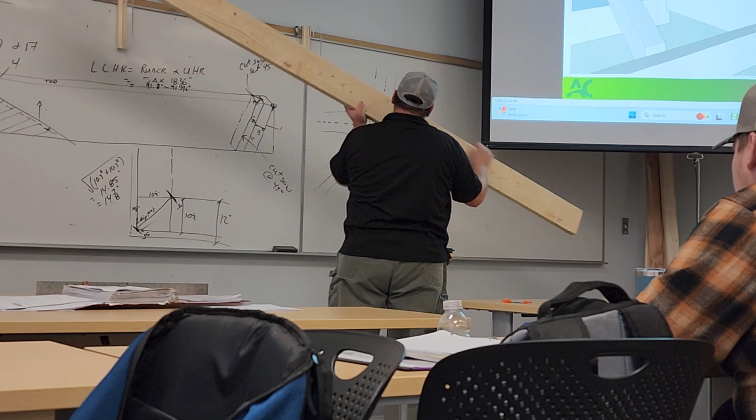Same way we did on the board here. That's probably something you should get used to doing: every time you lay out a rafter, do it the same way. Right? Don't flip around. So when I lay out a rafter, I normally stand on that side of the rafter. I've never changed my pattern. I always stand on that side of the rafter.

Now we start with the ridge on my left. Every time. Basically I have the rafter right here. This is the top of the rafter. I'm on top of the rafter. And I always start on the left side of the rafter, and I go towards the right. That's just the way I always did it. It's ingrained in my head. So try to stay to one pattern. Whatever you do, whatever works for you, stick to it.

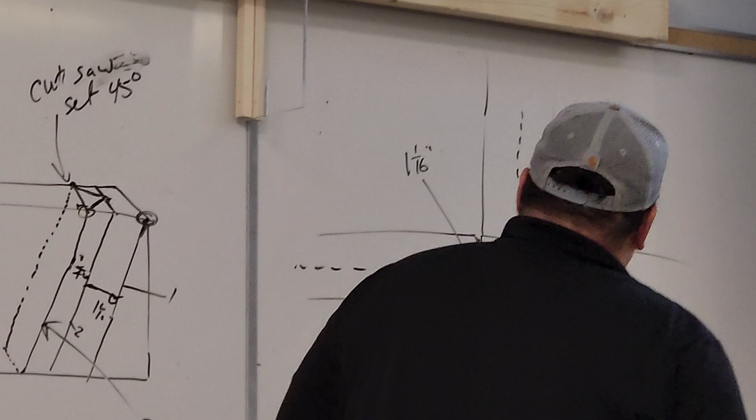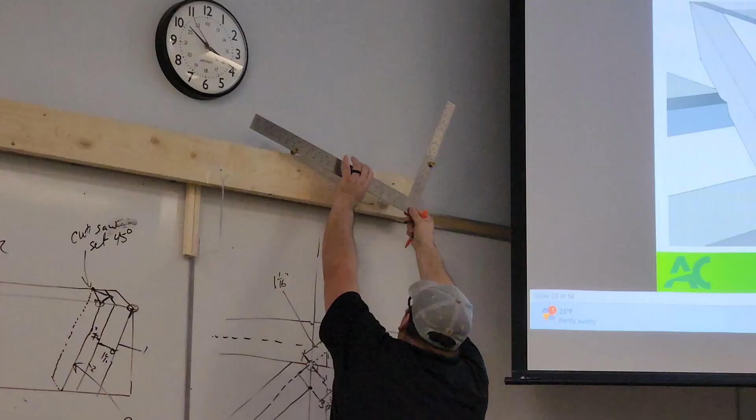Next step is getting that frame square set to 7 and 17. We already have that. And we're going to draw our plumb line 1, right at the corner of the piece of wood, so I can go ahead and hook onto it. I go right to the corner, draw that line right at the corner. Okay? Make sense?

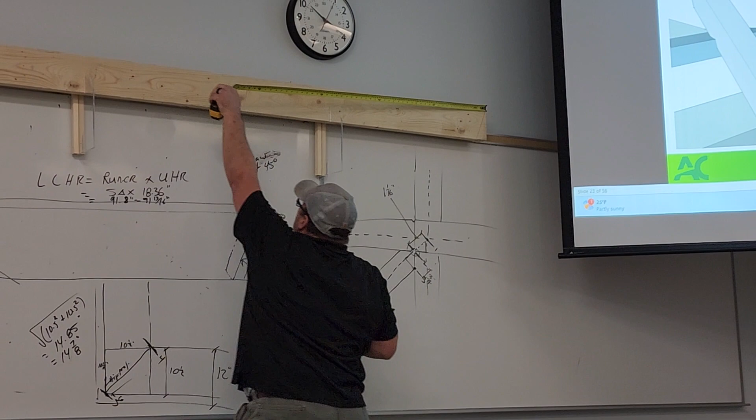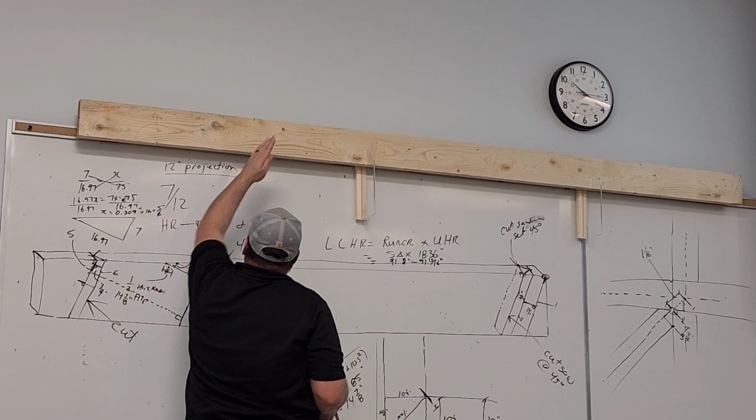Alright, same thing. I'm going to hook on now. I'm going to measure my 91 and 13/16. I'm hooking on right to the corner, going 91 and 13/16. Right at the top. 91 and 13/16. From there, plumb line, right? Which is giving us plumb line 4. Plumb line 4 right here.

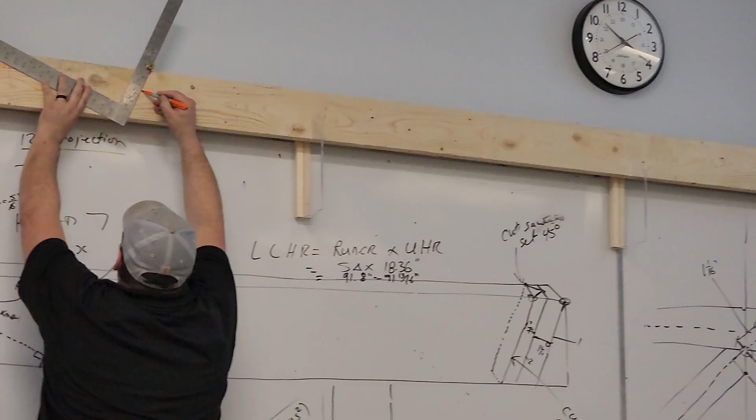Next step is the stand, right? So I draw that line. Our stand was 2.5, I believe. Right, we measure our common rafter. Measure your common rafter, see what your stand is. Do the same. That's basically 0, 1, 2.5. So I'm not going to bother drawing the line on this side because I know it's not right. I'm going to just take it that way.

While the square is sitting there, that's basically 0. I'm going to come to 3/4. So I'm measuring back 3/4. From there to there is 3/4, half the thickness of the hip. I slide my square over there. Hopefully it doesn't fall off the end. Now I got to 90 that up. So bring that to the top of the rafter. Wherever it hits the top of the rafter, I'm going to take it back across.

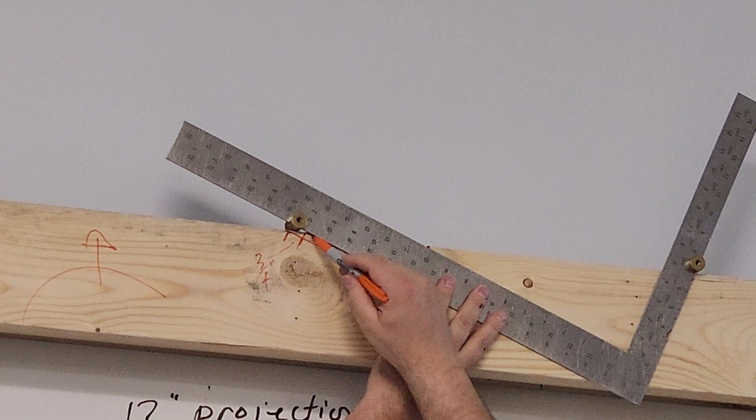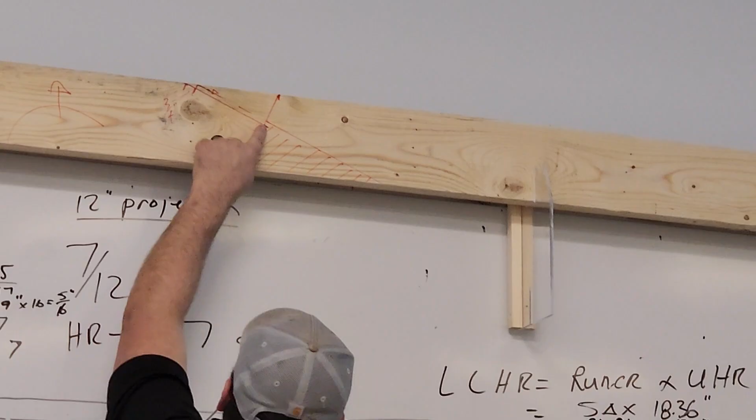So slide it back over. Can't really see if I'm in the right spot there, but probably close. Obviously, if I have it in front of me, I'd be able to see it. I take that line across. That's my cut line. That's where I'm actually cutting my bird's mouth to. That was the original. Carried it over, back 3/4, 90'd up, carried back across.

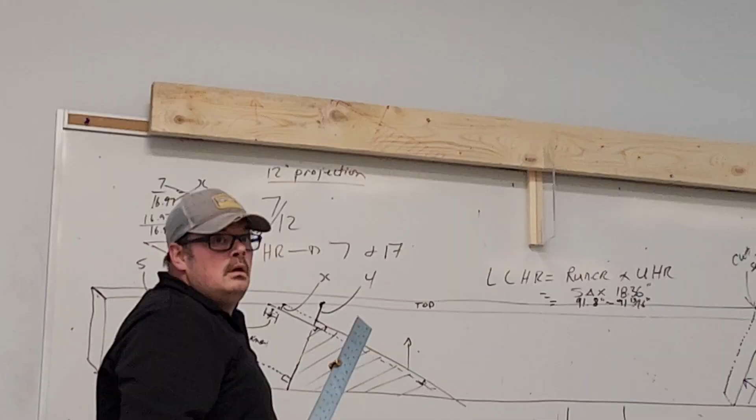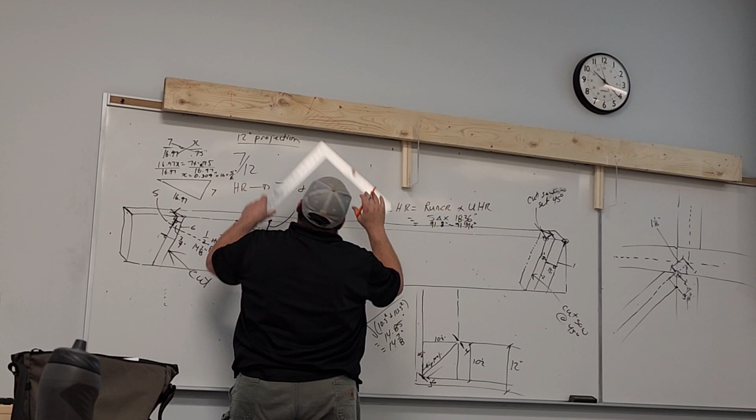What I did is I solved for X. Okay? Geometry, that's all that is. We did the math as well. So if I actually measured that, it's probably 5/16. Should be 5/16. I'm just not very accurate because I'm way above my head. Too short. Okay? Make sense?

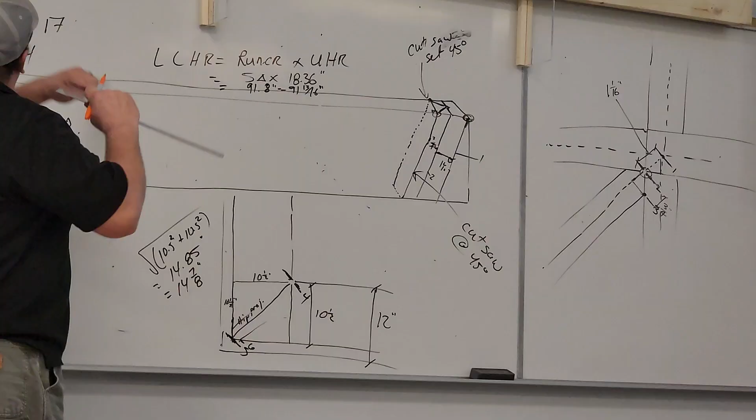Now what I'm going to do is get my projection. So I know the distance from 4 to 5 is my projection, which is 14 7/8. So I'll put that on. That's the corner of the building. Right? That's 4. That's the corner of the building. That's plumb to the earth. That's horizontal. So I'm going to go to 14 7/8. I'm going to put little crosshairs.

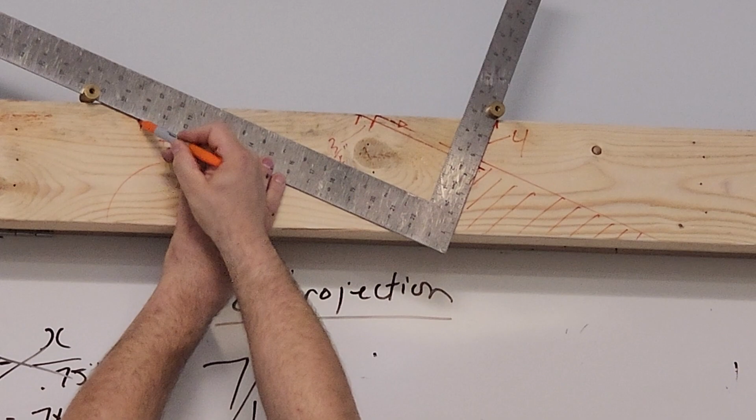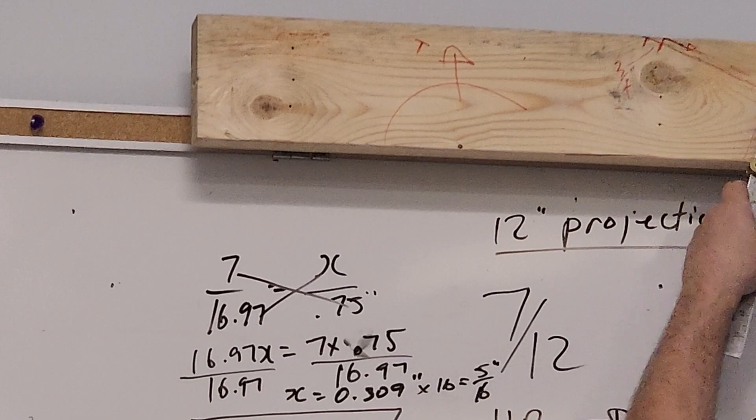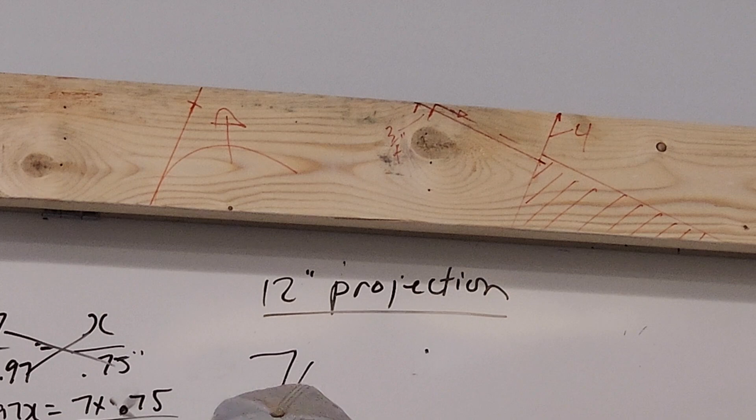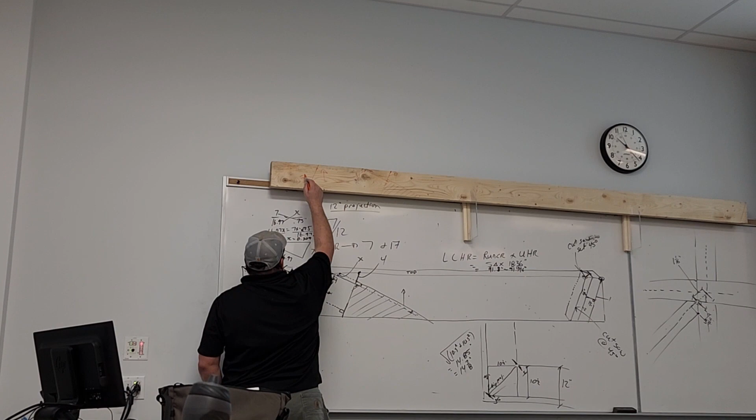See little crosshairs there? So if I had enough wood, I would just slide that over and draw that line there, but I don't. I can just rotate it around. As long as I'm plumb to that, I can use it, right? So make sure that's hitting here, that's hitting here. I hit my intersection of those two lines. I draw that line. This is where it'd be nice to kind of tilt it over. We good so far? That's line 5. Line 5, long point. So I'm going to pull that off now.

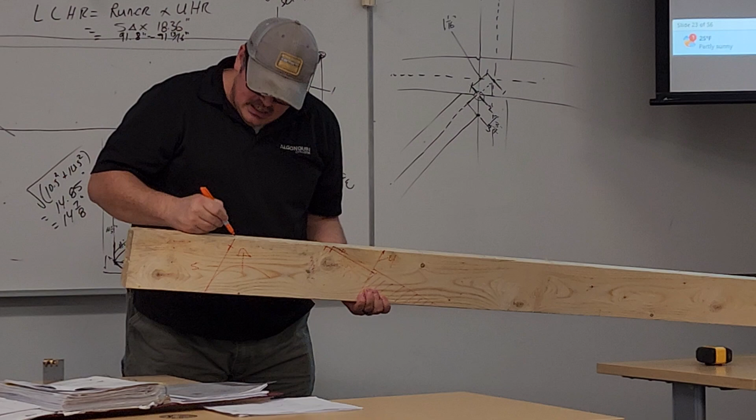And we'll just have a quick little peek there. So this is where I like to tell myself a story, right? So I'm just going to see how I'm sketching it. I'm sketching it across the top. What does that give me? That's giving me the center. So that's the long point. From there, I got to bevel back. See that sketch? It's not accurate. I'm telling myself a story.

I'm telling myself I got to go back 3/4 of an inch now, or if that's 3/4, I got to go back 3/4 here to then get that line. Can everybody see if I leave it here? Yeah. So basically, I'm going to go 90 degrees, 3/4. So draw that 90-degree line, measure 3/4, then I can actually put the square back in place on that line.

That's not my cut line, right? If I connect that to there, that's an accurate side cut. I don't need to put a line there. My saw will do that. My sketch tells me how to set my saw. Now if I take that point and 90 across to the other side, I can then draw it on the other side of the board. Okay? Once I have that point, I go 90 across. Take it from here, bring it to the other side. Now I'll just go on the other side and do the same thing. Right, so I just flipped it over, draw that line.

Now, when I actually have my saw, because I like using a blade on the right side, right, I tilt my saw like that, and I would cut like that. I learned off the old saws, right? Everybody else likes the blade on the left; I can't stand that. I was used to a normal sidewinder saw.

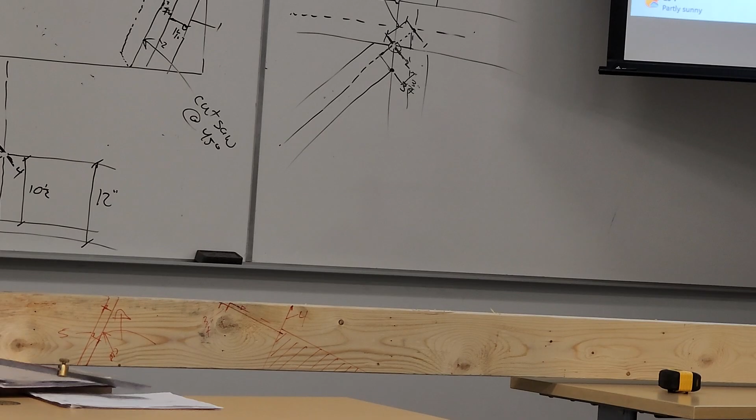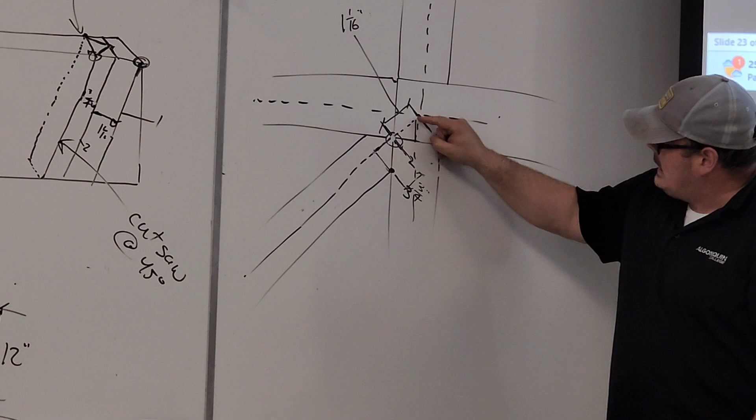Okay? Now, just the top. Let's slide this over a bit here. So I have that line 1. What I gotta get is line 2. Line 2 is the short, right? We're at line 1, we gotta get to line 2. That's 3/4, that's 3/4, that's 1 1/16. Anything on a plan view is horizontal. So I gotta go from that line, go horizontal.

Okay, so 90 degrees to a plumb line is horizontal. I'm gonna make a 90-degree line and go 1 1/16. I made a 90, 1 1/16. That's my short. Now I'm gonna put my square on there and draw that 7. Draw the 7 inside of the square. What does that give me? That gives me the center of the rafter at the longest point.

I'm gonna 90 that across. I could just sketch it though, right? Don't really need it accurate, so I just sketch it onto the top. Find the center, just by eye. Doesn't need to be accurate, just a visual. Then from there, that's the longest point, right? Longest point. I got angle away. So tell yourself that same story. Angle away. Not accurate, but telling me where I gotta go next.

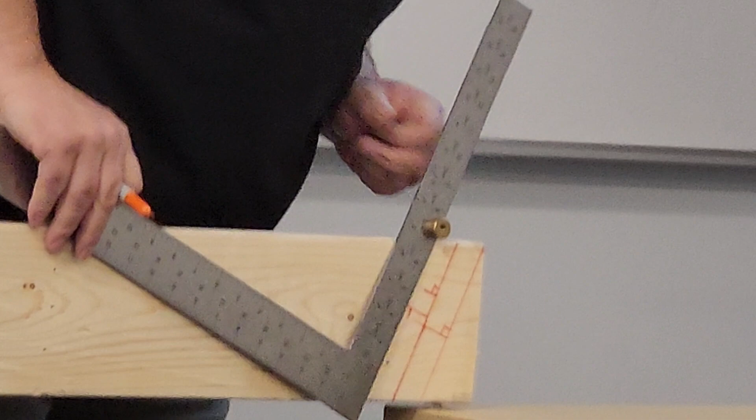If that's 3/4, that means I need to go 3/4 here to get that cut line. So again, it's 90 degrees. I'm gonna draw an accurate line there, 90 degrees to one cut, and draw another 90. I'll measure 3/4 on that line, and that's my new layout line. That's my side cut. Cheat a little off, it doesn't matter, right? Just a sketch. When I actually make the cut, it's gonna go from that point to there.

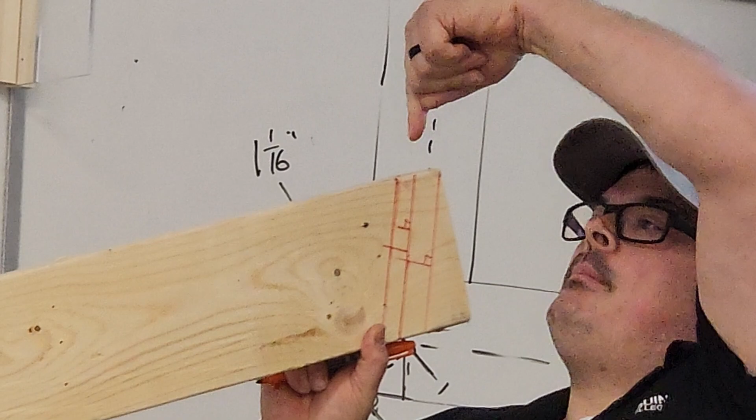Exactly. So the saw is set to a 45. You can't actually draw a 45 on that top view though. This is where it kind of gets confusing. There's a dihedral angle, which is a third angle that gets produced by a compound miter. Whenever you look from a bird's eye view, if I put this perfectly plumb to the earth and I was standing right above it, I see a 45. But when I throw it flat on the surface like this, the angle changes. That's why the side cut on every rafter is different.

You still set the saw to a 45, but you can't take a speed square and mark a 45 across the top. It's not a 45 on the edge. It's a 45 when it's plumb to the earth. When it's on the angle. Because it's on an angle, there's a third angle that gets produced. Okay? But then I can just take that point 90 across accurately, mark it on the other side. Right, so I just kind of 90 that across.

Now I'm going to take that point, go to 7/17, draw a plumb line there as well. There it is. So I got it on both sides. That's my cut line. There's my cut line on that side. So saw set to a 45. When I make that cut, that's what I'm gonna see. Flip it over, saw set to a 45, come over here, make that cut. I'm gonna end up with the same thing here.

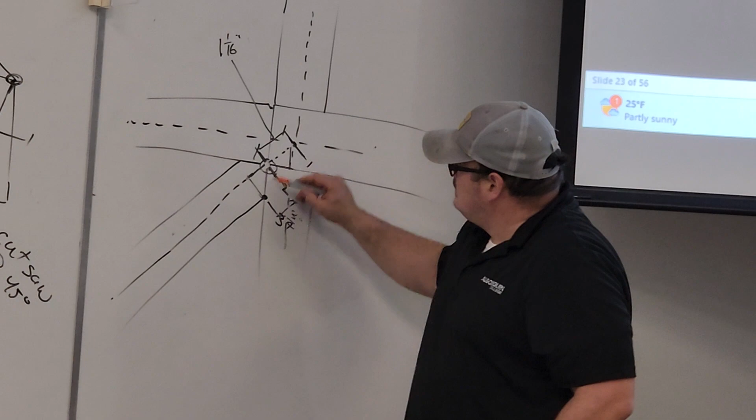The bottom. That's what my saw is gonna do. It'll produce that angle and bring it to a point, so it sits against the two common rafters. Give us a nice clean cut there. Okay? Another thing I like to do is clip off this bottom. We didn't do that on the drawing here, but clip off that bottom.

So again, if your face is 2x4, measure down from the short point 3.5 and clip it off. So you could do it on here. There's my long point, there's my short point. So from my short point, measure down 3.5, and then go 90 degrees to a plumb. Run down 3.5. It'll make it a little short, but that's fine. Otherwise, this is gonna hang below the surface.

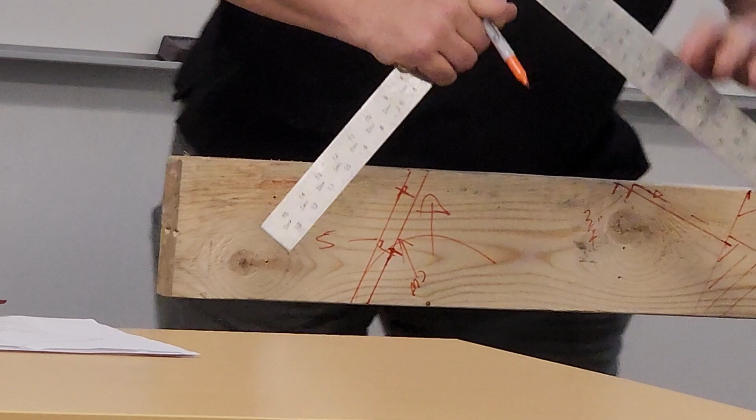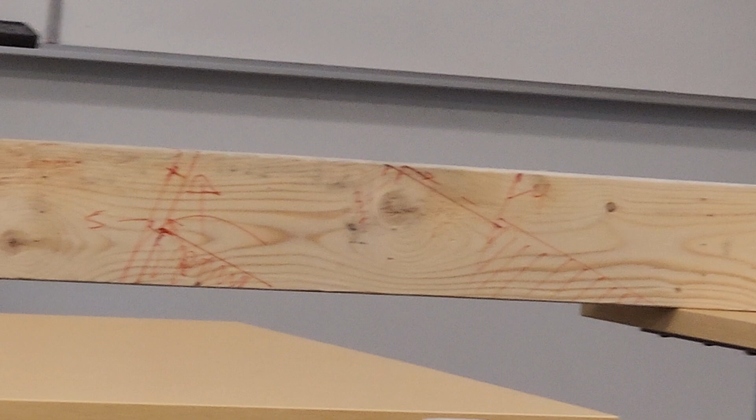Right, so I measure down 3.5 from here to that mark right there. Then I'll just use the 17 side of the square. That covers the top. You're gonna cut on that line on an angle, cut that bottom off, that'll be all removed. That's not the bird's mouth, the bird's mouth is over here. Okay? That kind of makes sense? Again, a lot of steps there.

There's one other thing I was gonna add, I can't remember what it was. But I think of it later. Are we okay with that though? Not too bad?